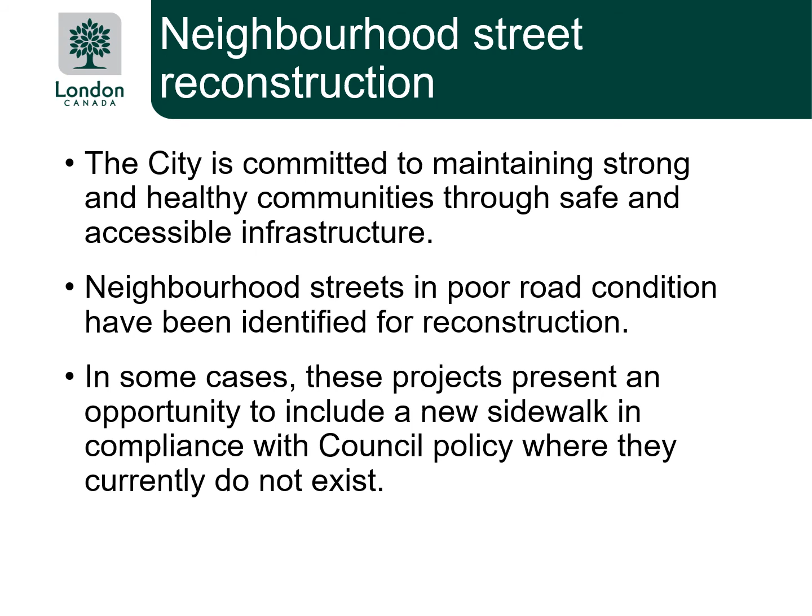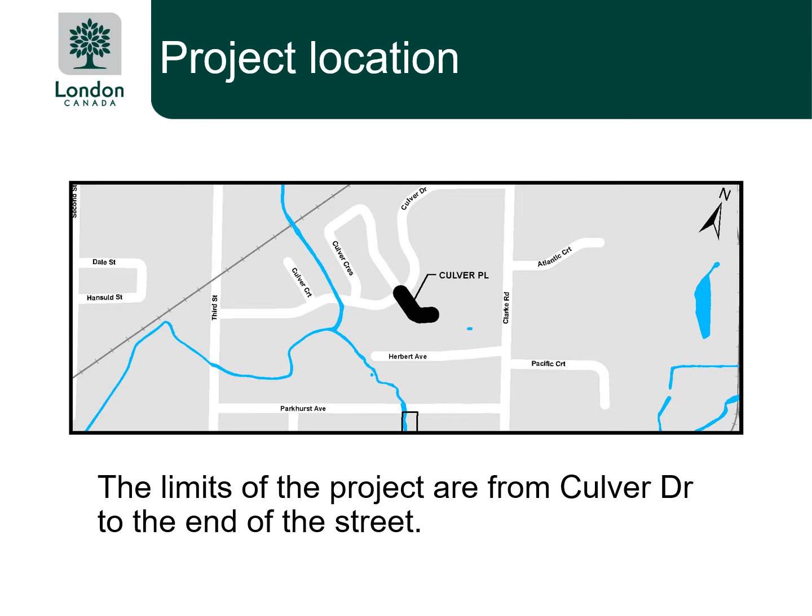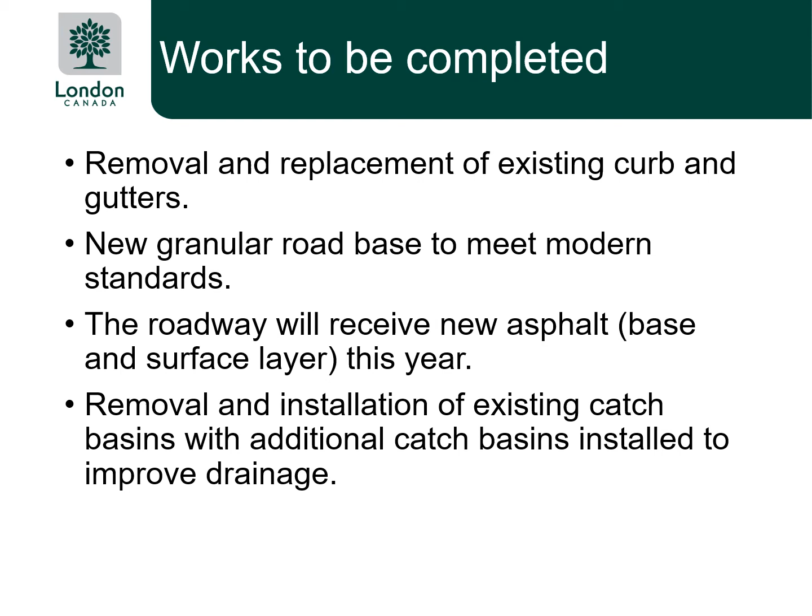Project overview. The project limits are Culver Place from Culver Drive to the end of the street. Works to be completed. The asphalt roadway and curbs and gutter will all be removed. A new granular road base will also be constructed to ensure the road has the support it needs to achieve its maximum life cycle. The roadway will receive new asphalt base and surface layer this year. Removal and installation of existing catch basins with additional catch basins installed to improve drainage.

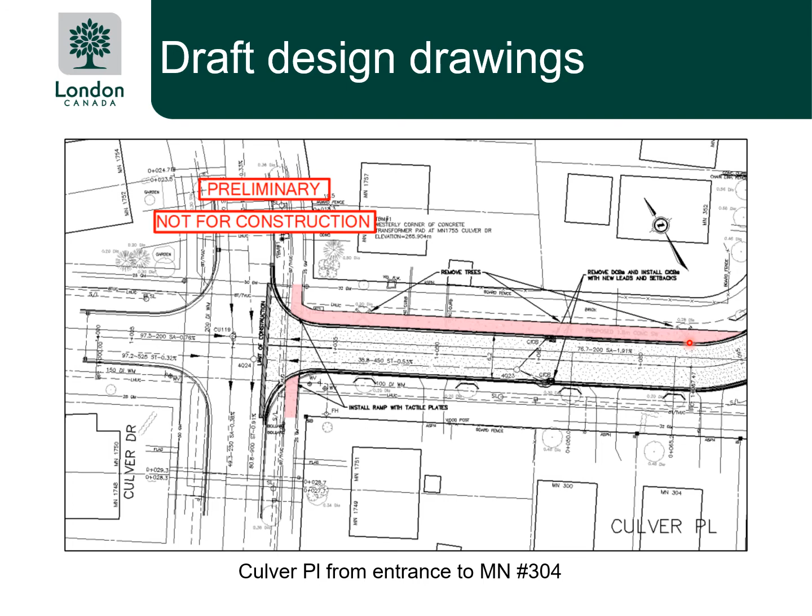Project design. Draft design drawings. Here you will see a typical engineering design drawing, showing a plan view of Culver Place from entrance to house number 304. The new sidewalk is also shown on the drawings along the north side of Culver Place, shown in pink color. As you can see by the laser pointer in here, these are the sidewalk limits. Please pause the video to take a longer look at the drawings at any point. This drawing shows Culver Place from house number 304 to house number 352.

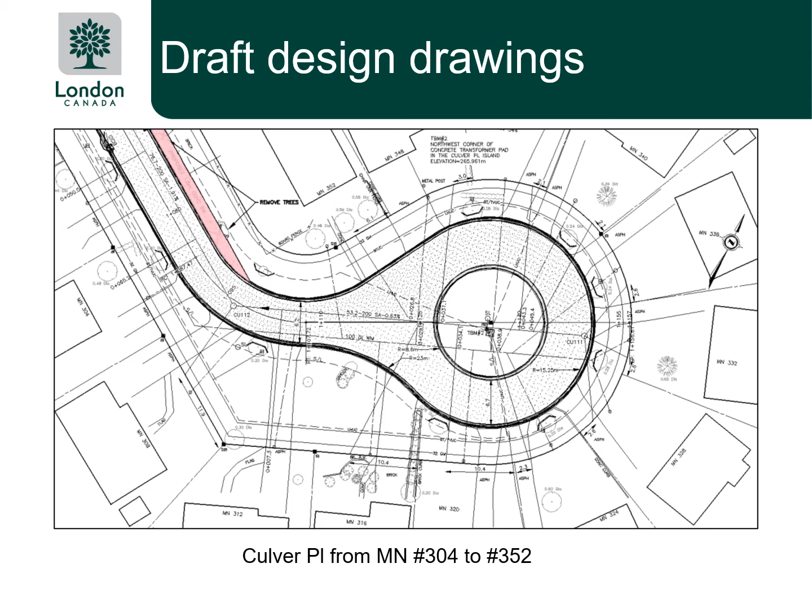What's ahead for construction? Pre-construction phase. Any trees that will be affected due to construction impacts or existing health concerns will be removed. All remaining trees within the city right-of-way will be protected with 1.2 meter high orange fencing supported with a metal T-post and 2x4 wood bracing along the top.

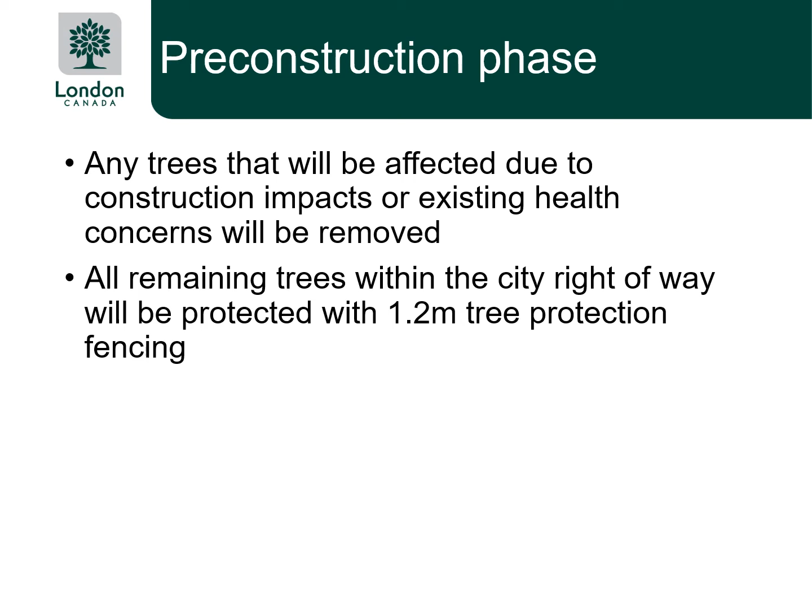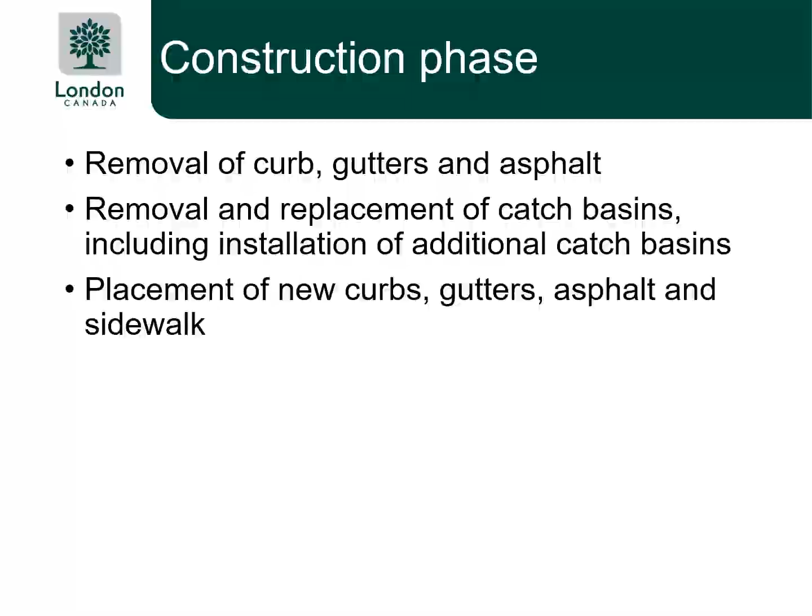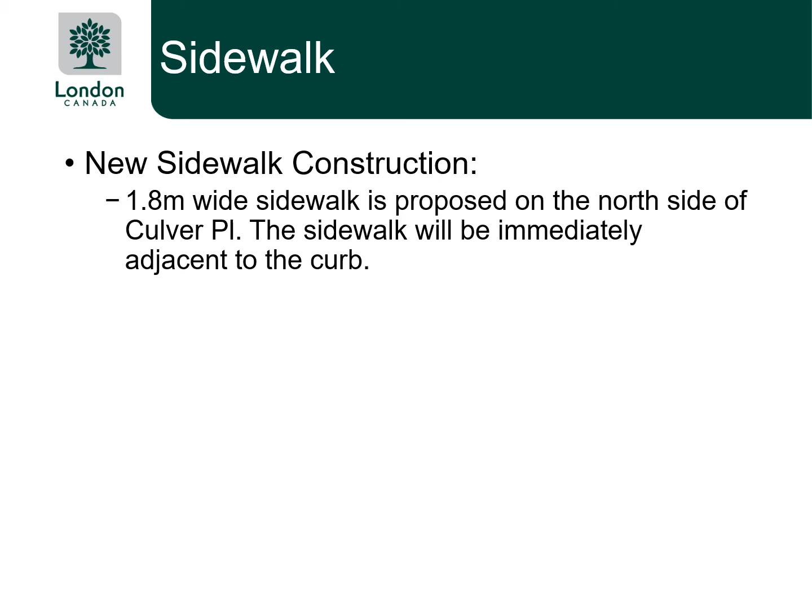Construction phase. During construction, all curbs and asphalt will first be removed. Existing catch basins will also be removed and replaced, and additional catch basins will be installed as required. Finally, placement of new curbs and gutters, asphalt, and a new sidewalk. Sidewalk. A new sidewalk is proposed on the north side of Culver Place. The new sidewalk will be 1.8 meter wide and will be immediately adjacent to curb.

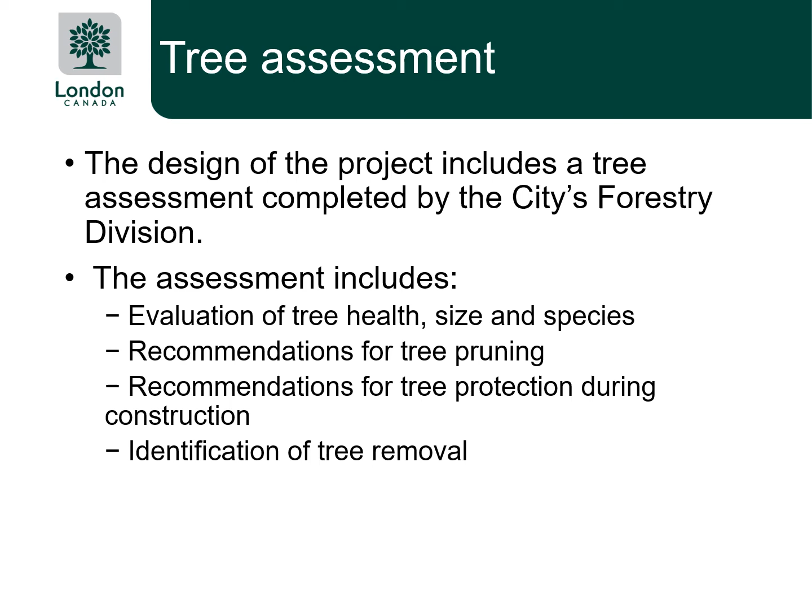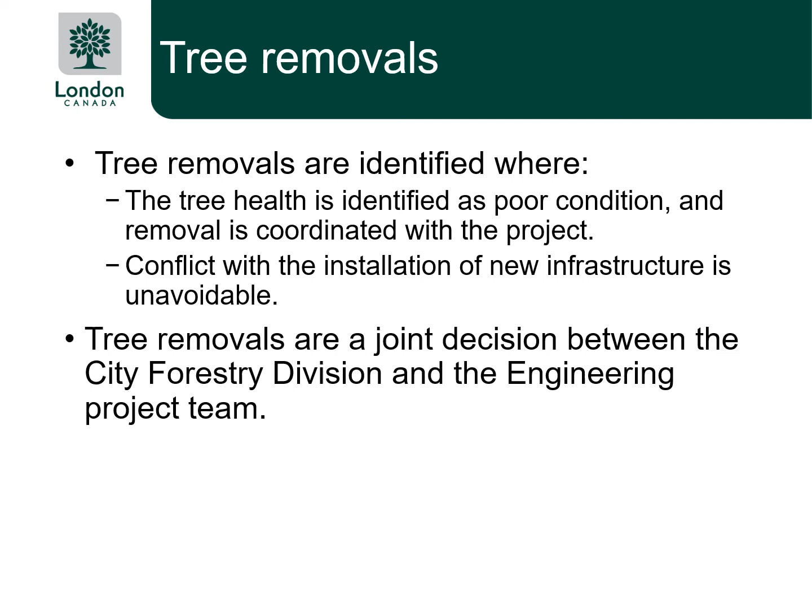Trees. Tree assessment. During the design process, an assessment is completed by the city's forestry division. This assessment includes an evaluation of tree health, size and species, including recommendations for tree pruning and tree protection during construction, and finally, an identification of tree removal. Tree removals. Tree removals are identified where the tree health is identified as poor condition and removal is coordinated with the project. Tree removals can also occur where a conflict with the installation of new infrastructure is unavoidable. Tree removals are a joint decision between the City Forestry Division and the engineering project team.

Tree planting. The city has a consolidated yearly contract for tree planting across multiple projects. The tree planting is not part of the construction project and will happen a year post-construction. The city's forestry division will assess and plan tree planting where applicable. Homeowners will receive more information from the city prior to replanting.

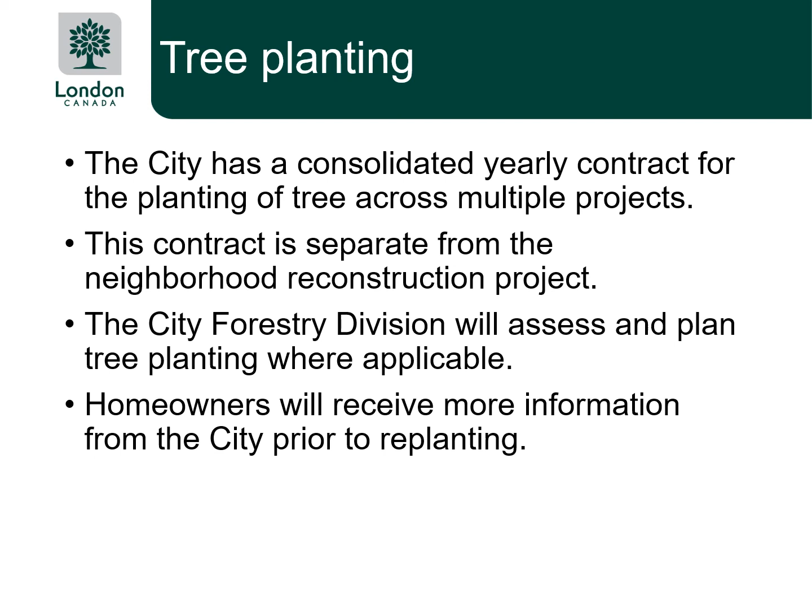Parking during construction. Parking and driveways. Access to driveways will be maintained except for times when work on driveways and curbs is completed. Cars can park on adjacent streets when this work is completed. Parking enforcement will be notified that construction will be ongoing and parking on adjacent streets will be allowed overnight. Please be mindful of all prohibited parking areas.

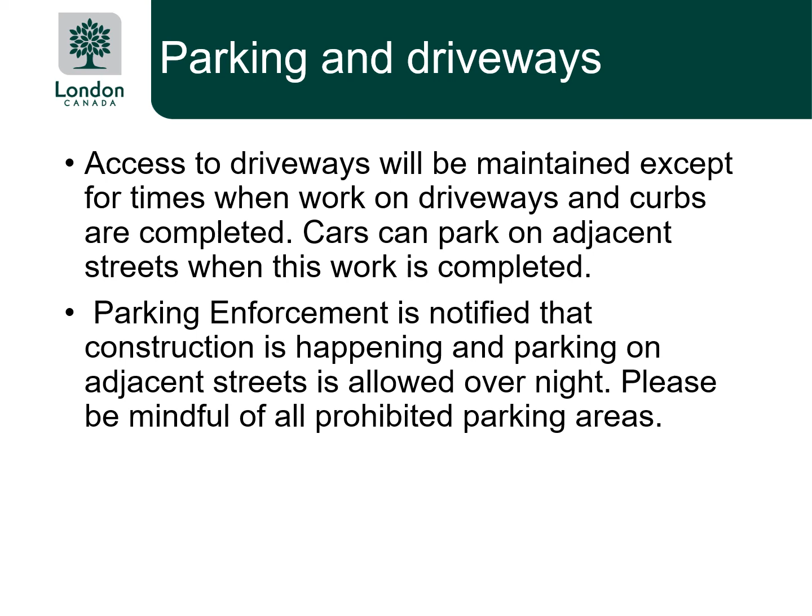Questions or comments? Finally, we would like to share how you can engage with our project team. If you would like to ask a question or leave a comment, please use the City of London's public engagement website, Get Involved. You can provide your feedback at getinvolved.london.ca/CulverPlace. We recognize that not everyone will be able to access this information online and will ensure residents receive a project update in their mail about this construction. If you would like to request information in an alternate format, please contact Kyle Fairhurst or Darius Dow and we will work together to best share this information with you.

Kyle Fairhurst can be reached by email at kfairher@london.ca or phone at 519-661-2489 extension 2496. Or you can contact Darius Dow by email at ddow@london.ca or phone at 519-661-2489 extension 8440. Thank you for your interest in the project and we look forward to keeping you informed.